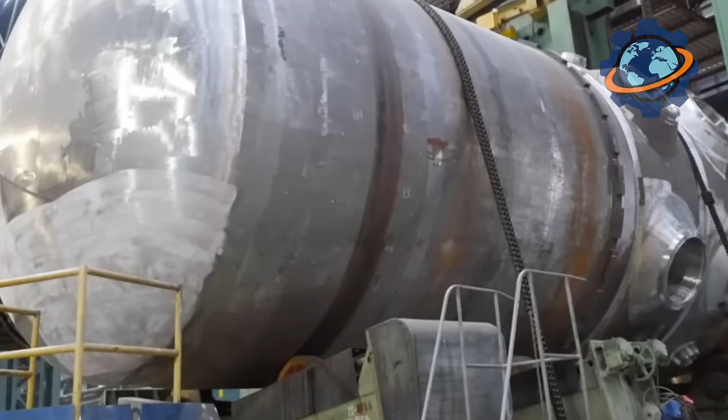Every second, 441 nuclear reactors worldwide generate electricity for 1 billion people. But here's what keeps engineers awake at night. Each reactor core operates at temperatures reaching 3,600 degrees Fahrenheit, hot enough to melt concrete, vaporize water instantly, and turn steel into liquid. The only barrier between civilization and nuclear catastrophe is a single steel vessel forged from a 600-ton ingot without a single weld.

Picture the weight of 4 blue whales compressed into one seamless cylinder, standing guard over controlled atomic fire. How does humanity forge the largest single-piece objects ever created? How do engineers ensure steel survives conditions that would liquefy most metals?

Stick around till the end. You'll discover why only one company on Earth can manufacture these reactor vessels, the jaw-dropping reason welds are forbidden, and the shocking truth about what happens when forging goes wrong at the atomic scale.

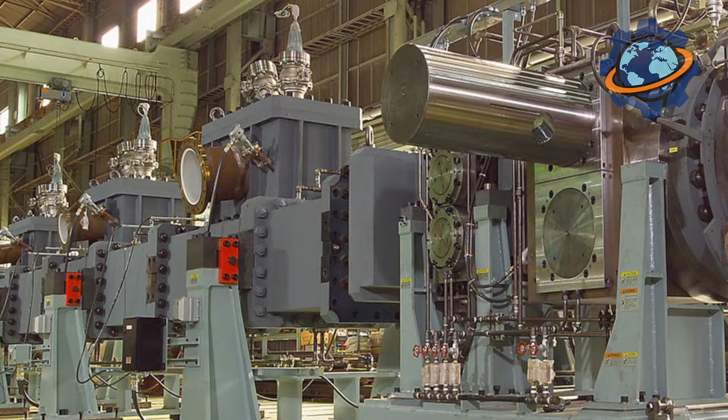The story begins at Japan Steel Works in Muroran, Japan, the only facility worldwide capable of forging complete reactor pressure vessels from single steel ingots. This monopoly isn't marketing, it's physics. Their forging press, standing 12 stories tall and weighing 14,000 tons, generates forces equivalent to stacking 70 Statues of Liberty on a dinner plate. That's the mechanical advantage required to shape 600 tons of glowing steel.

The facility consumes enough electricity to power 25,000 homes during forging operations. Backup generators the size of locomotive engines ensure power never interrupts mid-forge. A single unexpected cooling would create internal stresses shattering the vessel like glass.

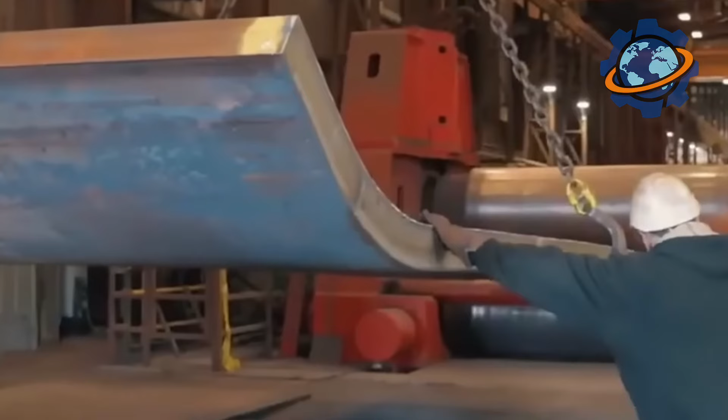The plant operates 3 shifts daily, yet completes only 4 reactor vessels annually. Each vessel requires 8 months from raw steel to finished product. That's longer than human pregnancy, applied to metalworking requiring tolerances measured in thousandths of inches across objects 30 feet tall.

Next comes steel creation, where metallurgists blend iron with precise amounts of manganese, nickel, chromium, molybdenum, elements chosen for neutron resistance and high temperature strength. The recipe, classified by nuclear regulatory agencies, creates alloy capable of withstanding 50 years of continuous neutron bombardment without becoming brittle. Standard steel exposed to reactor conditions becomes fragile within months. Reactor-grade steel must maintain ductility for half a century.

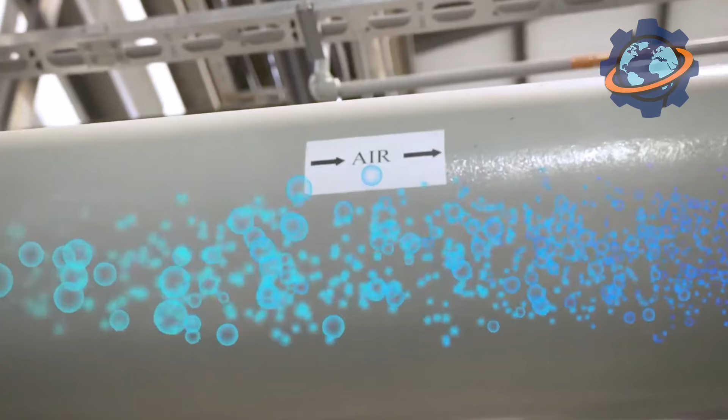Electric arc furnaces, consuming megawatts of power, melt 300 tons of scrap and alloys at 3,000 degrees Fahrenheit. Molten steel flows into massive ladles lined with refractory bricks capable of containing liquid metal without dissolving. Workers add deoxidizers and desulfurizers, removing impurities at parts per million levels. Even microscopic inclusions, trapped oxides, sulfides, or air bubbles become crack initiation sites under reactor pressures exceeding 2,200 pounds per square inch. That's pressure crushing car engines like soda cans.

Giant molds, assembled from water-cooled copper plates standing 20 feet tall, receive the molten pour. Liquid steel enters from bottom up through ceramic pipes, filling the mold cavity in controlled flow, taking 40 minutes. Technicians monitor fill rates continuously. Turbulence during pouring traps gas bubbles, creating voids.

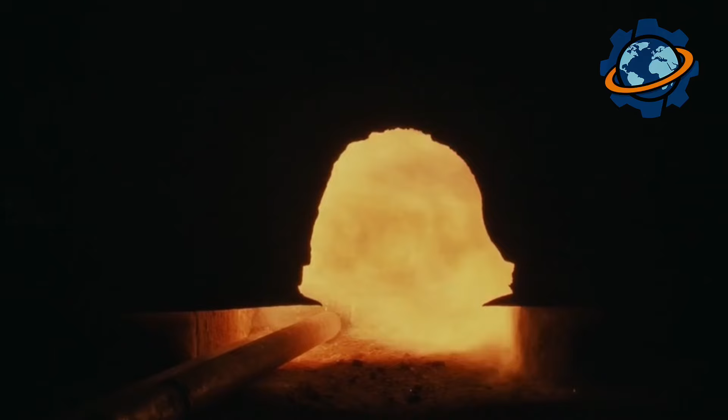After filling, the ingot, now a glowing cylinder weighing 600 tons, solidifies over 72 hours under computer-controlled cooling. This cooling phase determines everything. Cool too fast, thermal stresses create internal cracks invisible to naked eyes but catastrophic under reactor operation. Cool too slow, large crystals form, weakening the structure.

Thermocouples embedded throughout the mold measure temperature at 300 points simultaneously. The ingot shrinks 5 inches in diameter while cooling, enough movement to crack the mold if thermal expansion isn't calculated precisely. Workers strip the mold after 3 days, revealing a steel cylinder glowing dull red at 800 degrees.

Now comes forging, the ancient art of shaping hot metal, scaled to industrial extremes. The 600-ton ingot, reheated to 2,300 degrees Fahrenheit in furnaces large as houses, glows brilliant orange. At these temperatures, steel becomes plastic, not liquid, but deformable under immense pressure. Picture clay that weighs as much as a jumbo jet.

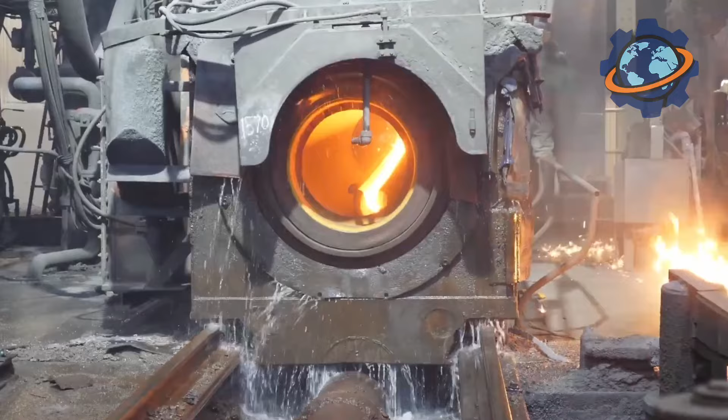Overhead cranes operating at weight limits requiring structural reinforcement throughout the building lift the glowing ingot onto the press bed. The press ram, a solid steel cylinder 6 feet in diameter, descends with force exceeding 14,000 tons. That's pressure equivalent to balancing 30 fully loaded Boeing 747s on a car hood. Under this incomprehensible force, 600 tons of steel deforms, spreading like bread dough, forming into a thick-walled cylinder.

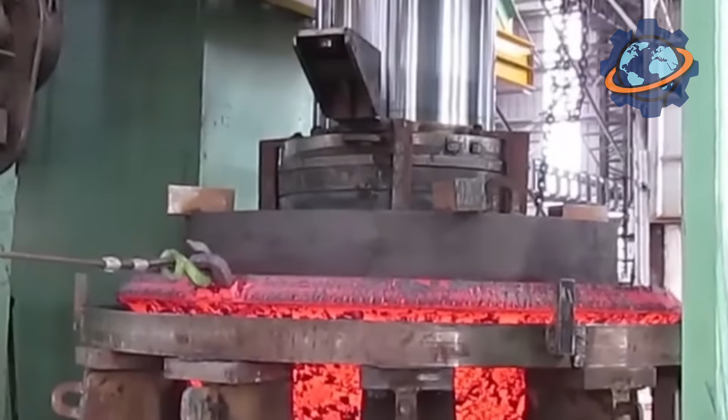Each press cycle compresses the ingot 3 inches, then retracts. The process repeats hundreds of times over weeks. The forging process requires balletic precision at colossal scale. After each press cycle, massive manipulators rotate the workpiece 7 degrees. Computer systems track rotation angle to within 0.1 degrees.

Because uneven forging creates thickness variations leading to stress concentration, the ingot must be reshaped uniformly, ensuring wall thickness varies less than 1% across the entire vessel. This step is critical because reactor vessel integrity depends on grain structure. Each press cycle compresses and elongates metal crystals, aligning them perpendicular to stress directions.

This crystallographic texture increases strength 30% over cast steel. Between press cycles, the workpiece returns to furnaces for reheating. Temperature drops to 1,800 degrees during forging, making steel too stiff to deform further. The ingot cycles between press and furnace 60 times, spending cumulative hours at extreme temperatures requiring constant atmospheric monitoring to prevent oxidation.

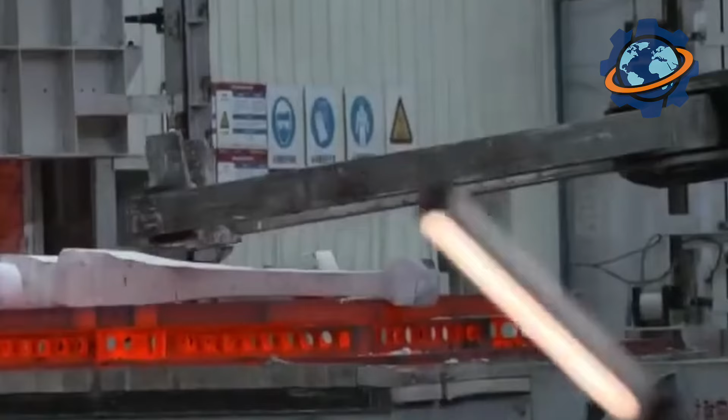After rough forging establishes basic geometry, precision machining begins. The forged cylinder, now weighing 450 tons after material redistribution, moves to vertical lathes with cutting surfaces 20 feet in diameter. Carbide tools, costing thousands of dollars and lasting mere hours, remove steel in continuous spiral cuts. Metal shavings, glowing red from friction heat, pile like metallic spaghetti.

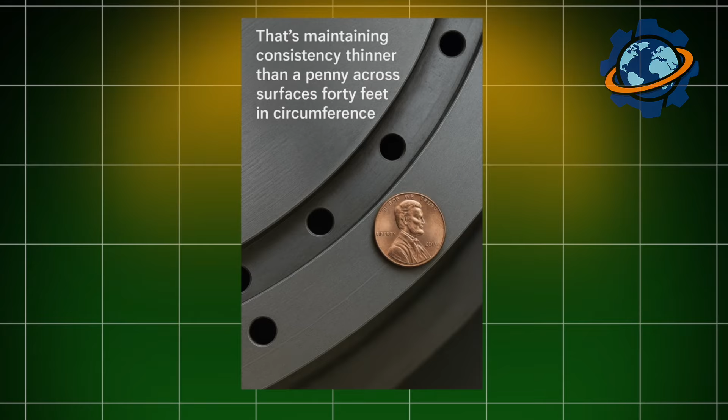Picture this. Machinists target wall thickness of 8.7 inches with tolerance of plus or minus 0.05 inches. That's maintaining consistency thinner than a penny across surfaces 40 feet in circumference. Ultrasonic sensors scan continuously, creating 3-dimensional maps of wall thickness. Any thin spot becomes a pressure concentration point, and at 2,200 psi operating pressure, stress concentrations cause catastrophic rupture.

Modern reactors operate at pressures where even microscopic flaws propagate into fractures within microseconds once initiated. Quality control transcends normal manufacturing standards, entering the realm of nuclear safety protocol. Ultrasonic inspection systems, using sound waves at frequencies beyond human hearing, detect internal flaws smaller than grains of rice. Technicians scan every cubic inch of the 450-ton vessel, searching for voids, inclusions, or crystal boundary irregularities. This inspection process alone takes 6 weeks of round-the-clock work.

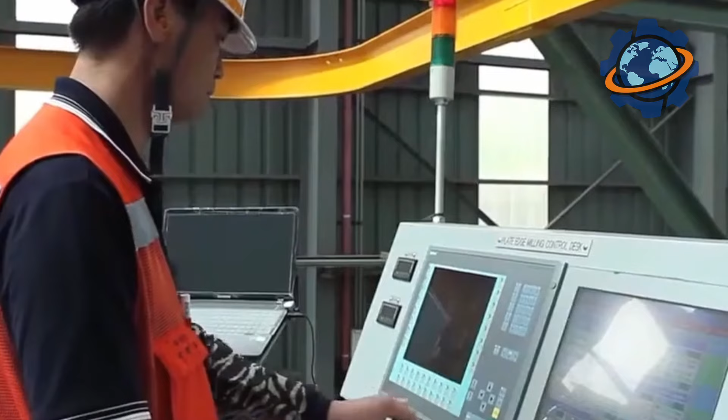Next comes stress relief heat treatment at 1,100 degrees for 48 hours. This annealing process allows internal stresses from forging to dissipate through atomic diffusion. Without stress relief, residual tensions from manufacturing cause cracks years later during operation.

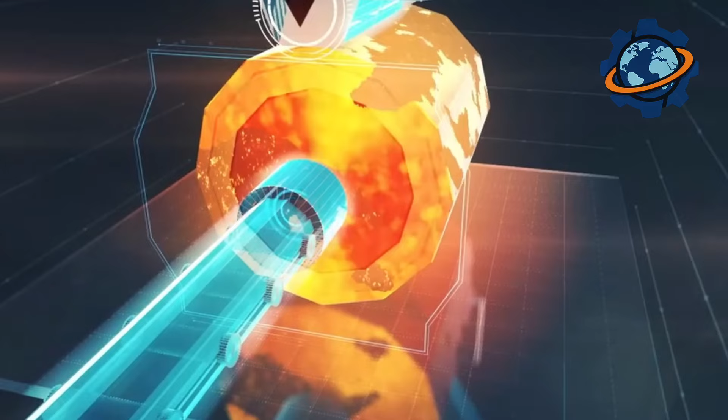After heat treatment, hydrostatic pressure testing subjects the vessel to 3,300 psi, 50% beyond operating pressure. Workers flood the interior with water, then pump pressure until the vessel expands measurably. Any weakness reveals itself through leakage or deformation. Passing this test certifies the vessel can contain reactor core meltdown scenarios.

The breakthrough came when Robert Withrich at Combustion Engineering proposed seamless forging in 1963. However, no forge press existed powerful enough. Japan Steel Works developed their 14,000-ton press in 1967 specifically for reactor vessels, recognizing the strategic importance. By 1975, all new reactor designs mandated seamless forgings.

Today, the safety record speaks volumes. Zero pressure vessel failures in commercial reactors using forged construction. The few accidents that occurred, Three Mile Island, Chernobyl, and Fukushima, involved cooling system failures, not vessel integrity. Those forged steel shells contain disaster, preventing far worse outcomes.

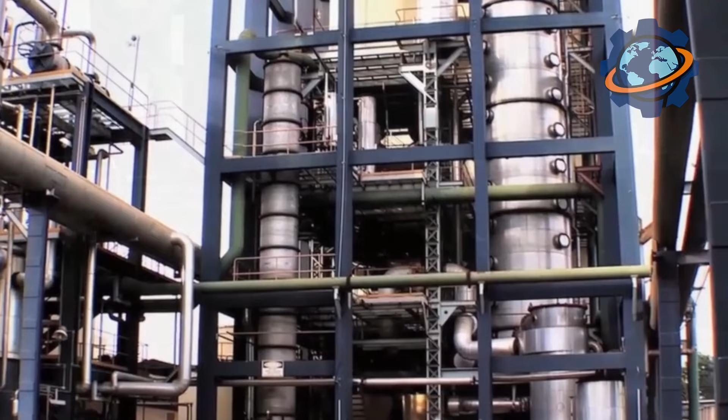So here's the secret promised. These vessels can't be welded because neutron radiation does something insidious to metal. It transmutes atoms. High-energy neutrons knock atoms from crystal lattice positions, creating vacancies and defects. Over decades, accumulated damage makes steel brittle. Welds, where crystal structures merge imperfectly, accumulate damage faster. The heat-affected zone becomes an embrittlement accelerator.

Seamless forging eliminates this Achilles heel entirely. Every atom in the vessel exists within continuous crystal structures aligned through forging. There are no boundaries to fail, no weak points to fracture. From 600-ton ingots to civilization's guardians, the cycle completes. We've engineered the ultimate containment, steel vessels standing between humanity and atomic fire for generations.

These aren't just industrial products, they're monuments to engineering paranoia in the best sense, over-engineering driven by understanding that failure means catastrophe. That forged steel cylinder represents humanity's ability to harness cosmic forces while building redundant safety margins into physical structures. We've learned to respect the atom's power by building cages worthy of containing it.

Every second, jet engines spinning at 12,000 revolutions per minute thrust hundreds of passengers across continents. But here's what defies physics. Inside those engines, turbine blades made of nickel alloy operate at 3,000 degrees Fahrenheit, temperatures exceeding their own melting point by 200 degrees. Picture holding ice cubes in boiling water without them melting.

That's the metallurgical miracle happening 35,000 feet above your head. How does metal survive temperatures that should liquefy it? How do engineers grow crystals larger than your hand from molten metal?

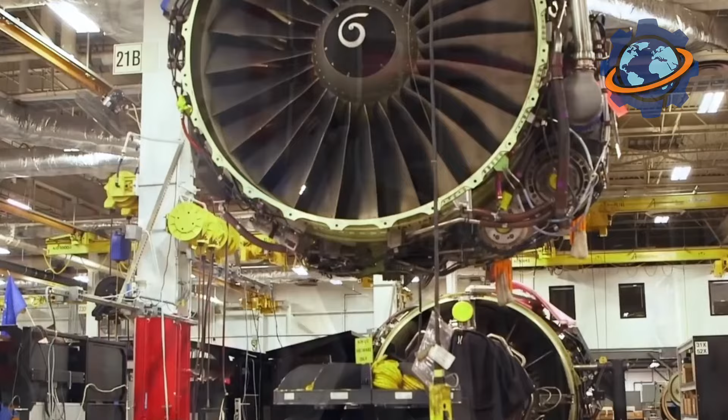Stick around till the end, you'll discover the jaw-dropping secret of single crystal manufacturing that eliminated metal's greatest weakness, and why a single turbine blade costs more than your car, yet lasts 20 years in literal hell.

The story begins in specialized foundries where clean room standards rival semiconductor fabs. These facilities maintain air purity of less than 100 particles per cubic foot, 10,000 times cleaner than normal atmosphere. Even microscopic dust particles cause catastrophic flaws in turbine blades spinning at speeds where centrifugal forces generate stresses exceeding 70,000 pounds per square inch. That's pressure crushing steel like aluminum foil.

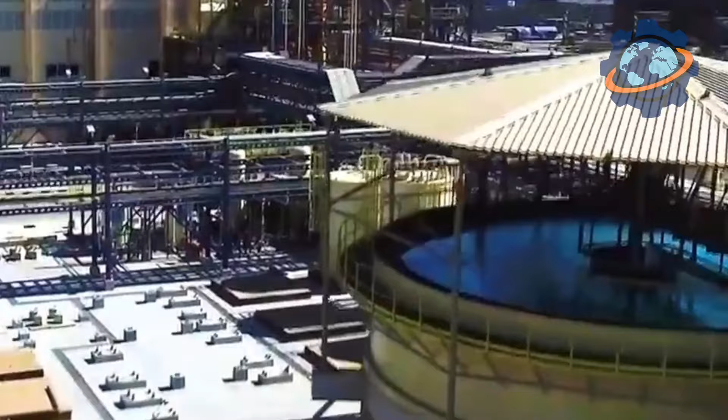Workers suit up in full-body cleanroom gear before entering casting halls. Inside, massive vacuum furnaces standing 2 stories tall and weighing 80 tons create environments replicating outer space. Vacuum pumps evacuate air until pressure drops to 1/1,000,000th of atmospheric pressure. At these conditions, materials behave differently. Impurities vaporize instantly. Gases trapped in metal escape, leaving behind purity impossible at normal pressure. Processing single batches costs $50,000 in electricity alone.

Next comes mold preparation, where ceramic shells, think pottery on steroids, get built layer by microscopic layer. Technicians dip wax patterns shaped like turbine blades into ceramic slurry 10 times, waiting hours between coats. Each layer adds thickness thinner than human hair. After 20 days of coating and drying, workers melt wax away in autoclaves, leaving hollow ceramic molds with internal channels more complex than human circulatory systems.

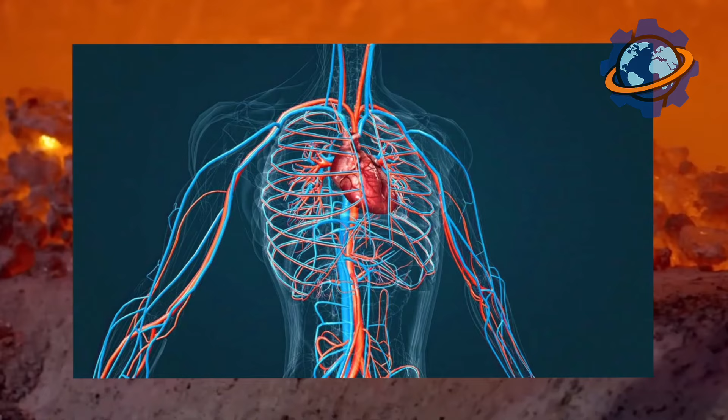These molds contain passages narrower than spaghetti strands, designed to cool blades from inside during operation. Some channels measure just 0.008 of an inch across, thinner than credit cards. Manufacturing these passages requires such precision that lasers verify every dimension. One blocked cooling hole means blade failure at 300 degrees lower temperature. That's the difference between safe flight and catastrophic engine disintegration at cruise altitude, scattering turbine fragments through fuselage like shrapnel.

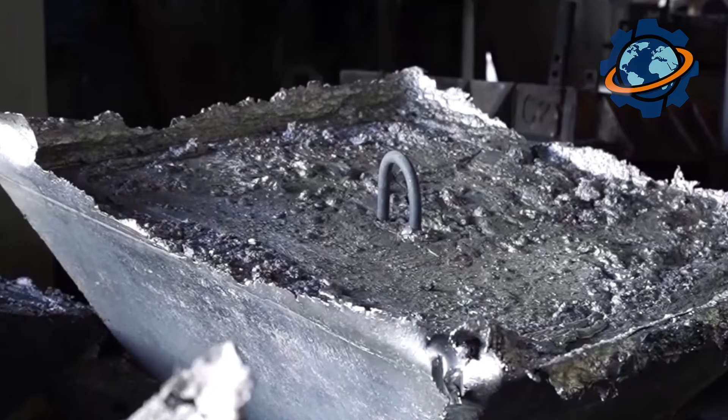Giant crucibles containing nickel-based superalloy. Mixtures of nickel, chromium, cobalt, aluminum, titanium, plus 6 other elements in exact proportions. Heat to 2,700 degrees Fahrenheit. Picture liquid metal glowing white like miniature stars captured in ceramic containers. This superalloy, developed through decades of research, contains more expensive elements per pound than fine jewelry. A single turbine blade uses materials costing $800 before any manufacturing begins.

Robotic arms lower ceramic molds into this molten inferno with precision measured in thousandths of inches. Timing matters critically here. Pour too fast, turbulence creates defects. Too slow, metal solidifies prematurely. Furnaces tilt at exactly 2 degrees per second, filling mold cavities in 17 seconds. During this pour, metal temperature drops 300 degrees, requiring computer-controlled heating to maintain consistency. One temperature fluctuation of 5 degrees ruins the casting, wasting months of preparation.

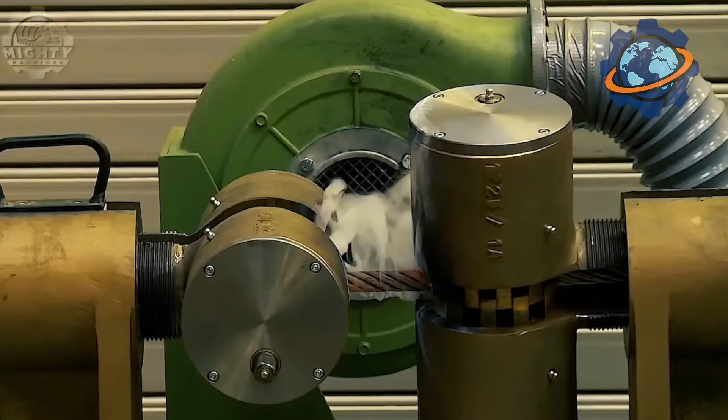Now comes the magic, directional solidification. The filled mold sits atop a water-cooled chill plate at 70 degrees Fahrenheit while surrounded by heating elements maintaining 2,400 degrees above. This creates the steepest temperature gradient in metallurgy, over 2,000 degrees difference across 6 inches. That's transitioning from Arctic to volcanic conditions in the space between your thumb and pinky. Slowly, incredibly slowly, a computer-controlled mechanism lowers the mold through the furnace at speeds of 6 inches per hour. Picture watching paint dry, then slowing that down tenfold.

As the mold descends, metal solidifies from bottom upward in a razor-thin freezing front. This directional cooling forces crystal growth in one direction only, upward, eliminating horizontal grain boundaries where cracks normally form. The process takes 14 hours for a 4-inch blade. Rush it by even 10% and polycrystalline grains form, destroying blade strength.

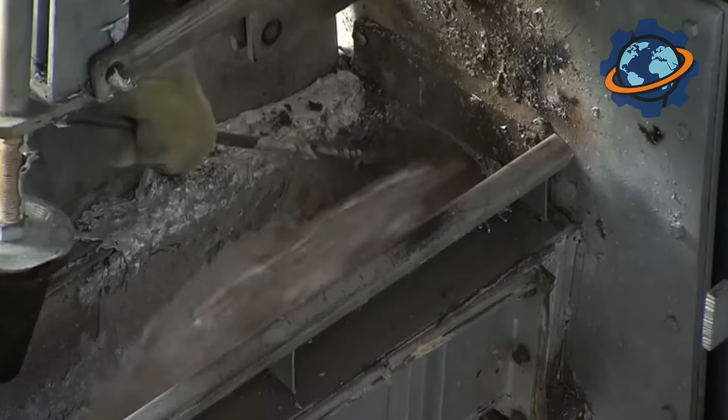But here's where physics becomes art. At the mold bottom sits a grain selector, a corkscrew-shaped passage so narrow only one crystal nucleus fits through. As metal solidifies upward, countless tiny crystals form at the chill plate. They compete, growing upward like metallic trees racing toward sunlight. Most hit the spiral walls and stop. Only the perfectly aligned crystal, the one matching the spiral's orientation, passes through this metallurgical gauntlet.

This step is critical because it ensures the entire blade, every atom from root to tip, belongs to one continuous crystal lattice. No grain boundaries exist anywhere. Normal metals contain millions of grain boundaries per cubic inch. Single crystal blades contain zero. Without boundaries, there are no weak spots where atoms slip past each other under stress. The crystal structure extends uninterrupted through the entire blade like a three-dimensional molecular Kevlar vest, with atoms locked in perfect geometric formation.

After solidification, blades undergo solution heat treatment at 2,200 degrees Fahrenheit for 2 hours, then quench in inert gas. This locks crystal structure permanently and precipitates microscopic strengthening phases throughout the lattice. Next comes aging heat treatment, multiple cycles at precisely controlled temperatures that cause nanoscale particles to form. These particles, called gamma-prime precipitates, occupy 70% of the alloy's volume.

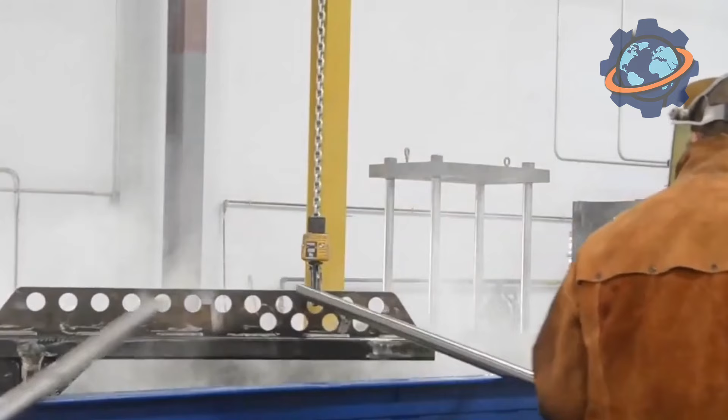Picture this. Imagine a three-dimensional checkerboard where hard particles pin the crystal lattice, preventing atoms from sliding. These precipitates remain stable at temperatures where other metals liquefy. They're the secret allowing nickel alloys to maintain strength at 3,000 degrees, temperatures where aluminum vaporizes, titanium melts, and even steel becomes taffy. The heat treatment process takes 96 hours of precise temperature control. Deviate by 15 degrees at any point and mechanical properties drop 40%.

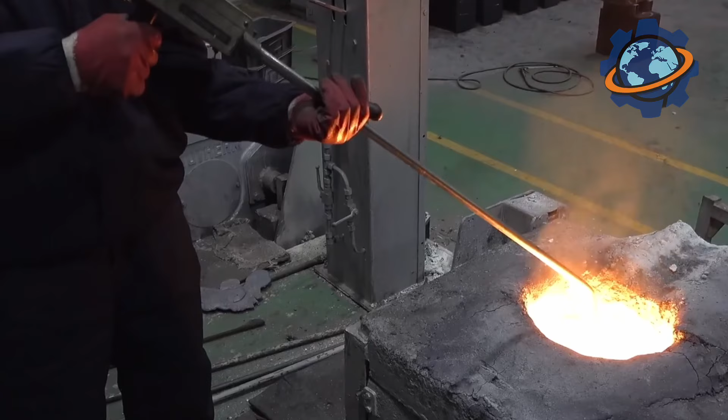Coating application transforms already sophisticated blades into thermal protection systems. First, a metallic bond coat, aluminum-rich alloy, gets applied via high-velocity plasma spray at 20,000 degrees Fahrenheit. Metal particles accelerate to twice the speed of sound, impacting the blade surface with such force they cold weld instantly. This creates a rough surface for subsequent layers while providing oxidation resistance.

Then comes the thermal barrier coating, yttria-stabilized zirconia ceramic, applied atom layer by atom layer using electron beam physical vapor deposition. In vacuum chambers, electron beams vaporize ceramic ingots. The vapor condenses on rotating blades, building up a coating 0.008 of an inch thick with a columnar microstructure full of microscopic pores. These pores act like thermal insulation, trapping air pockets that reduce heat transfer.

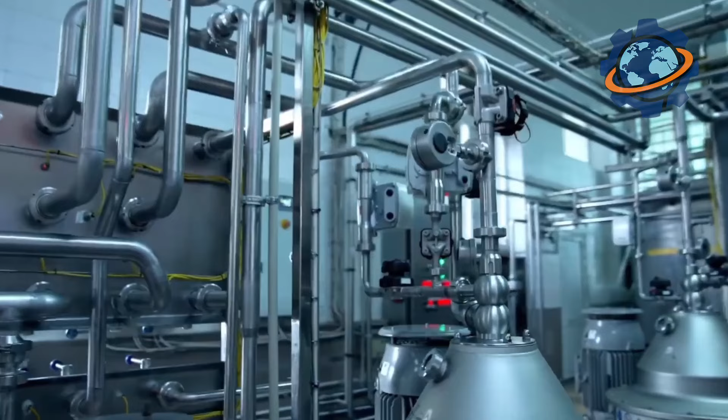The ceramic coating lowers blade temperature by 400 degrees, the difference between survival and meltdown. Modern engines couldn't exist without this coating technology. This wasn't always possible. Back in 1940, early jet engines used cast iron turbine blades lasting 20 hours before failure. Temperatures barely reached 1,400 degrees Fahrenheit.

The breakthrough came when Pratt & Whitney researcher Frank VerSnyder invented directional solidification in 1966, eliminating transverse grain boundaries and doubling blade life overnight. The true revolution arrived in 1982 when General Electric and Pratt & Whitney independently perfected single crystal casting. Turbine inlet temperatures jumped from 2,000 degrees to 3,000 degrees Fahrenheit, a 50% increase enabling massive efficiency gains. Modern turbofan engines achieve fuel efficiency triple that of 1960s designs.

Today, advanced engines like the GE9X powering Boeing 777X aircraft operate at 3,200 degrees, with pressure ratios reaching 60 to 1. These engineering advances cut aviation fuel consumption by 65% per passenger mile over 50 years. Carbon emissions dropped by 12% when replacing older turbine blades with modern single crystal versions in existing engines, equivalent to removing 18 million cars annually from global fleets.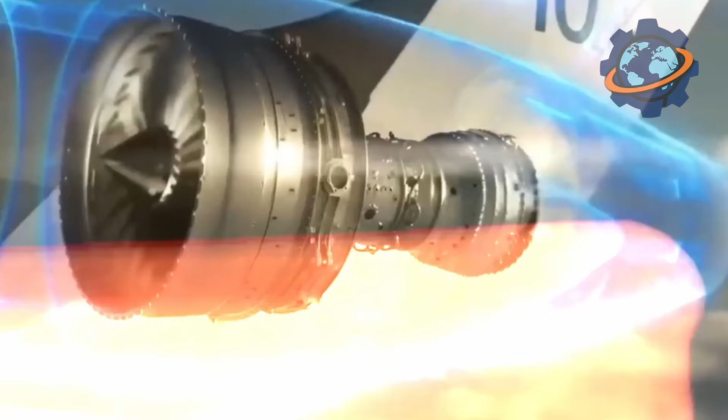Airlines save over $47 billion yearly through improved fuel efficiency. Maintenance costs drop 58% because single crystal blades last 3 times longer than conventional ones. So here's the secret promised. These blades don't actually survive above their melting point through material strength alone. They're actively cooled by air bled from the compressor, flowing through those microscopic internal channels at supersonic speeds.

This cooling air, already compressed to 400 degrees Fahrenheit, seems hot by human standards, but runs ice cold compared to the 3,000-degree combustion gases outside. Combined with ceramic coatings reflecting heat like mirrors, the actual metal temperature stays below 2,000 degrees, hot enough to glow orange, but survivable. From molten metal to flying miracles, the cycle completes.

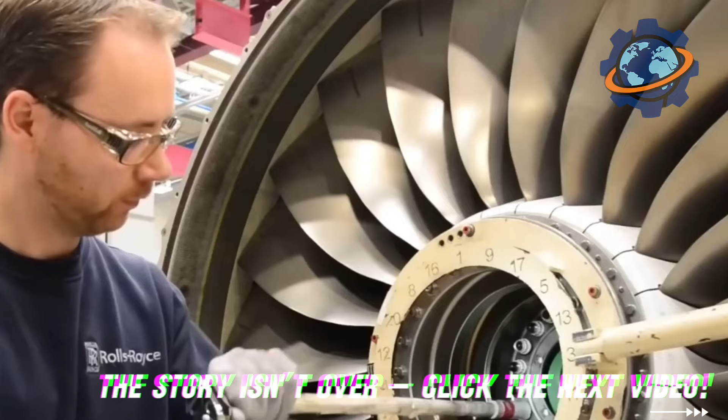Single crystal turbine blades represent humanity's most sophisticated metal casting achievement. Objects where every atom's position matters, where crystal orientation determines survival, where manufacturing tolerances make computer chips look crude. We've engineered metal to survive in conditions nature never intended, creating materials that work at their physical limits. That's not just manufacturing, that's molecular architecture enabling the modern world's ability to shrink distance itself.

Every year, over 100,000 kilometers of new rails are laid across the planet. And every single one of them goes through hell first. Fire over 1,500 degrees, the crushing force of rollers, and jets of water that cut metal like glass. From scrap heap to gleaming steel, a rail's journey is like an initiation, where every step decides whether it survives or shatters under the first train. But what makes this steel so perfect that it can handle thousands of tons of pressure every day without bending or cracking? Stick around, and you'll see how the arteries that move the entire world are born.

First, you gotta make the steel. A mix of scrap metal, iron ore, coke, and limestone gets dumped into the furnace, the raw ingredients for a future rail. The temperature in the blast furnace hits over 2,700 degrees Fahrenheit. That's 1,500 Celsius. Under that hellish heat, the metal turns liquid, glowing like the sun. Workers keep a close eye on the composition. Even an extra 0.1% of carbon can make the rail too brittle or too soft.

After melting, the molten steel is poured into molds, metal forms that create rectangular blocks called ingots or slabs. They don't look like a rail yet, just solid bars a few meters long and over a foot wide. After pouring, each blank is cooled, but not completely. It's kept warm to reduce stress during the rolling process.

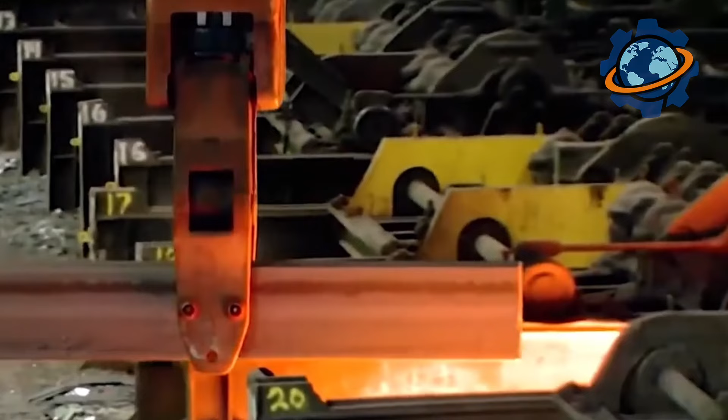This stage is the foundation for everything. If the steel comes out bad, even a perfect rolling job won't save it. So quality control here is almost a ritual. Chemists check the composition, metallurgists monitor the temperature, and automatic sensors track the cooling uniformity. Only when every single parameter is locked in does the blank move on into the fiery heart of the rolling mill.

In the rolling mill, massive billets, up to 20 meters long, are heated in furnaces to over 2,200 degrees Fahrenheit, 1,200 Celsius. The metal becomes pliable, like dough, but keeps its density and strength. The hot blank is immediately fed into reversing rolling stands. These are huge machines with heavy rollers. It passes through them several times, first to reduce its thickness, then to give it the right shape.

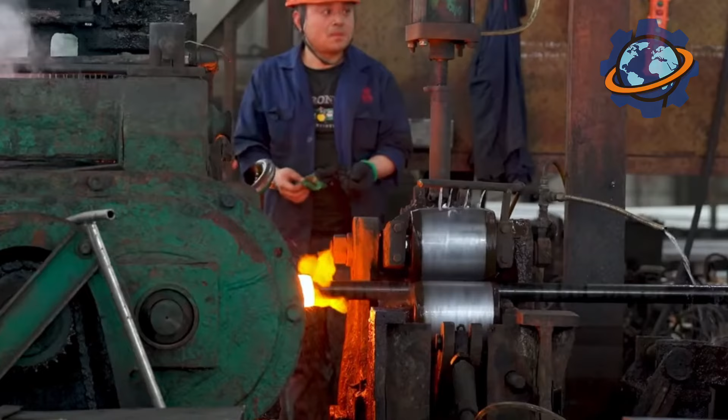Each pass is a squeeze and stretch, gradually transforming the metal from a simple billet into a future rail with its complex profile: the head, the web, and the foot. To get the exact geometry, they use a final sizing roll. It's like the final polish of the shape, with tolerances on this step not exceeding 0.3 of a millimeter.

Right after rolling, while the rails are still hot, they go through a cooling process. They're either evenly blasted with air or left to cool on an open rack. It's crucial that the cooling is symmetrical, otherwise the metal could warp.

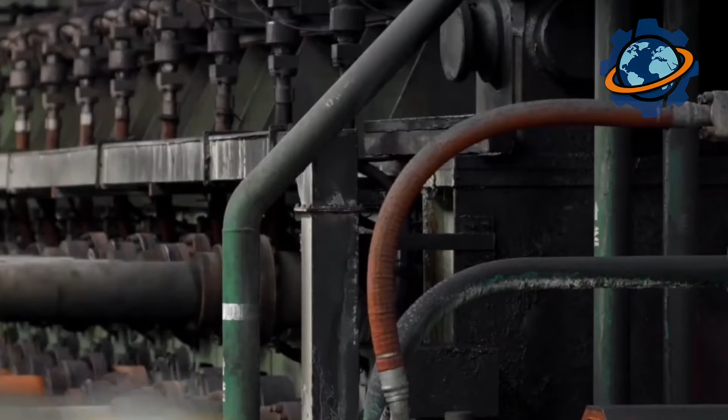To ensure a smooth, bump-free ride at high speed, individual rails are welded into long sections, up to 400 meters without a single joint. The main method is thermite welding. In a special mold between two rails, a gap of a few millimeters is left. A molten steel mixture, created by the reaction of powdered aluminum with iron oxide, is poured in. The temperature hits a scorching 4,500 degrees Fahrenheit, 2,500 Celsius.

This molten metal flows into both parts of the rail and fills the joint area. When it solidifies, it creates a monolithic bond, stronger than the rail itself. After that, the excess metal is trimmed off, and the weld is ground down to a perfectly smooth level, without a single bump. Every joint is inspected with ultrasound or eddy currents to make sure there are no hidden micro cracks.

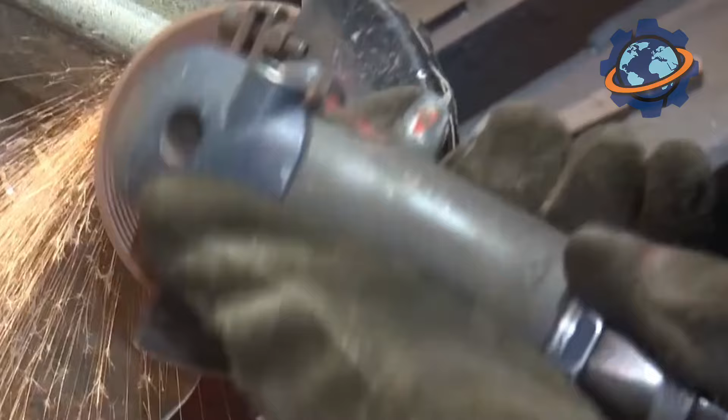These long rails are easier to transport than you'd think. They're either wound onto special drums or carried on platforms with pivoting supports. And on the construction site, the sections are joined again, this time by welding or using special bolted joints. The result is a continuous rail line that stretches for kilometers without a single click. The same silent glide we've come to expect on high-speed trains.

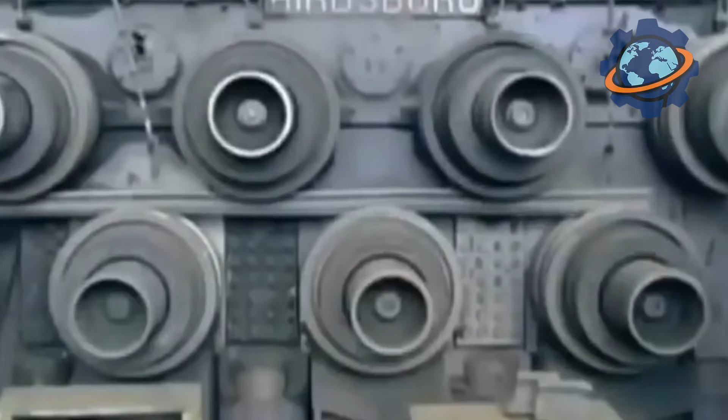But first, after rolling and welding, the rails are still alive. There's stress left inside the metal, and the grain structure needs to be stabilized. This is where heat treatment comes in, giving the rail its strength, wear resistance, and durability. And it looks almost like a metallurgical spa session. The rail is rapidly heated to high temperatures, around 1,800 degrees Fahrenheit, 1,000 Celsius. This is done in furnaces, tens of meters long, where the temperature is controlled to the degree. At this heat, the steel's crystal lattice shifts into a new state, austenite.

But the main event starts after that. The rail is instantly cooled. Jets of high-pressure water are aimed along the head and web, the very parts the wheel rolls on. The temperature drops in a flash, and a new structure forms in the metal, martensite, an extremely hard, wear-resistant phase.

But to avoid brittleness, the rail is slowly heated and cooled one more time. This balances the structure, relieves any extra internal stress, and ensures the rail can handle frost, heat, and thousands of trains a day. In the end, the metal holds its shape and withstands pressures of tens of tons per square inch without deforming.

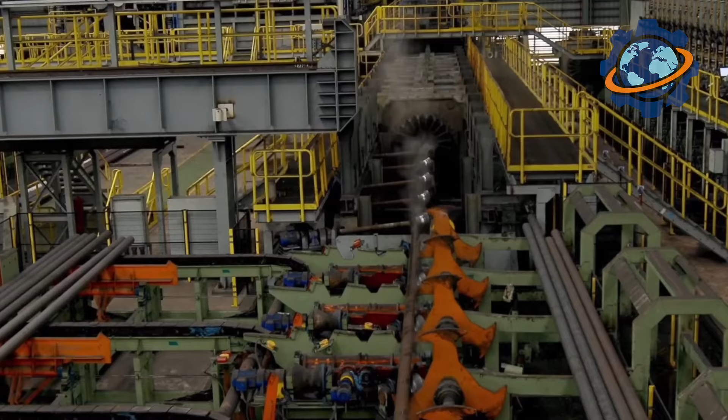Before a rail hits the road, it goes through a whole series of tough tests, like it's trying to join an army of high-speed transport. In special labs, it's checked for strength, hardness, geometry, and internal defects. First up, ultrasonic testing. High-frequency waves are sent into the rail. If there's a micro crack or void inside, the signal bounces back and flags the problem.

Then, hardness measurements along its entire length to make sure the heat treatment was uniform. At the same time, its straightness and profile are checked. Laser sensors scan every inch, detecting even tiny warps that could cause vibration or wear. And finally, bend and impact tests. A piece of the rail is loaded with pressure dozens of times greater than the weight of a train to make sure it can handle any challenge on the route. When the rail has successfully passed all the tests, it's time for its most important journey, to the installation site.

But how do you transport giant metal strips over 90 meters long? Regular trucks can't handle it. Here, they use special railway platforms with curved supports that reduce stress and prevent the rail from sagging or vibrating during transit. Sometimes, rails are transported already welded into even longer sections, from 400 to 600 meters.

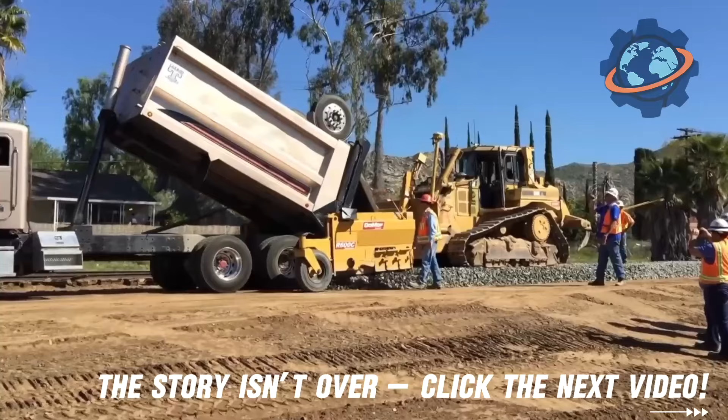Before installation, the rails are heated or cooled depending on the ambient temperature. This is to compensate for the thermal expansion and contraction of the metal. Otherwise, it would buckle in the heat or gaps would form in the cold. In practice, each rail is laid with these physical changes in mind, usually at a stress-free temperature point.

How does rust-colored rock transform into gleaming steel skyscrapers? How do ancient mountains become modern civilization? Stick around till the end. You'll discover why iron shaped human history more than gold ever did, and the jaw-dropping secret hiding inside every bridge, car, and building around you right now.

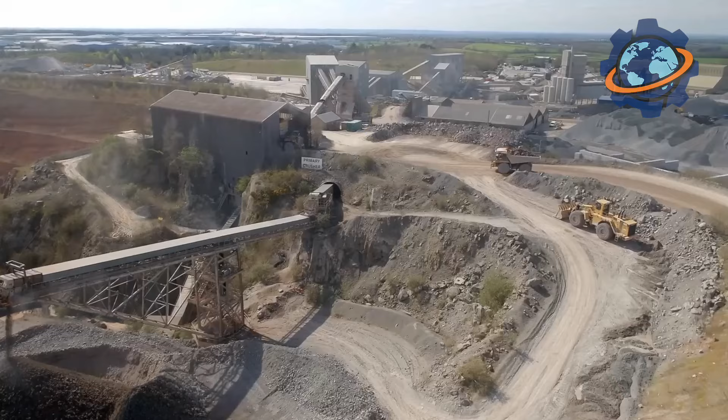The story begins in Western Australia's Pilbara region, where iron mountains stretch across landscapes older than dinosaurs. Massive excavators, standing 8 stories tall, picture buildings that walk, tear into rust-red cliffs with bucket teeth weighing 12 tons each. These mechanical giants rip through rock layers formed 3 billion years ago when Earth's oceans first rusted.

With thunderous crashes echoing across 40-mile-wide craters, each excavator loads haul trucks carrying 400 tons per trip. That's the weight of 80 elephants moving at 40 miles per hour on tires taller than basketball hoops. Processing 30 million tons annually from single mines, enough iron ore to build 12 Golden Gate bridges every single day.

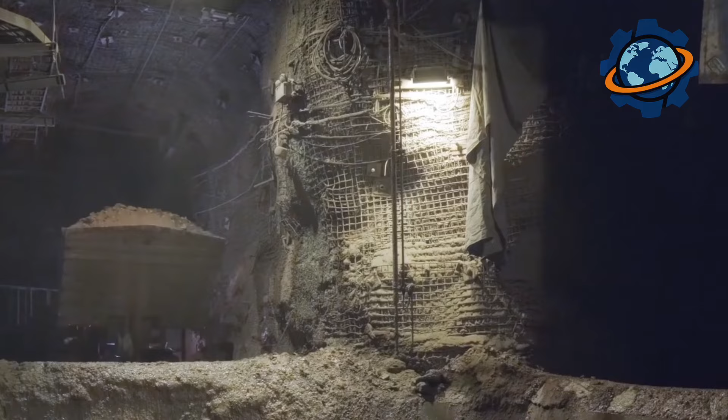Next comes crushing, where house-sized jaw crushers, imagine dinosaur mouths made of hardened steel, pulverize boulders into gravel-sized chunks. With deafening roars splitting eardrums even through protection, these crushers generate forces exceeding 20,000 pounds per square inch. Clouds of red dust billowing upward create artificial sunsets visible from space satellites.

Conveyor belts stretching 12 miles long, longer than Manhattan, transport crushed ore at 18 miles per hour. Workers riding inspection carts traverse distances requiring 25 minutes one way. That's enough belt to wrap around 300 football fields. Every hour, 50,000 tons flow through this system, weight equivalent to 5 Eiffel Towers moving continuously past checkpoints.

Giant grinding mills, standing 5 stories tall, with diameters matching Olympic swimming pool widths, pulverize rock into fine powder. Inside these rotating drums, 20-ton steel balls, each weighing more than shipping containers, tumble with ore, creating grinding thunder heard miles away. Operators monitor vibrations. Wrong frequencies mean catastrophic bearing failures, costing millions.

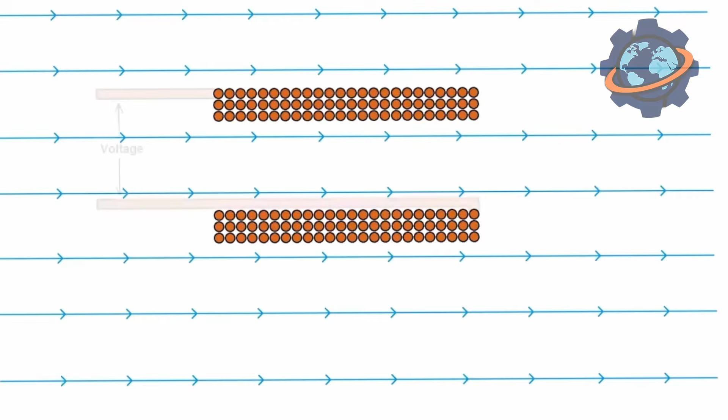At rotation speeds creating gravitational forces triple normal Earth gravity, particles shrink to powder finer than talcum. Processing 8,000 tons hourly, that's filling semi-truck after semi-truck every 30 seconds. This powder, called concentrate, contains 65% iron. Magnetic separators then extract iron particles using forces strong enough to levitate railroad spikes, leaving waste rock behind.

Next comes the blast furnace, a towering inferno standing 30 stories high, its steel shell glowing dull orange even from outside. At internal temperatures exceeding 3,000 degrees Fahrenheit, hot enough to vaporize aluminum instantly, iron ore transforms into liquid metal. Picture Dante's Inferno engineered with precision.

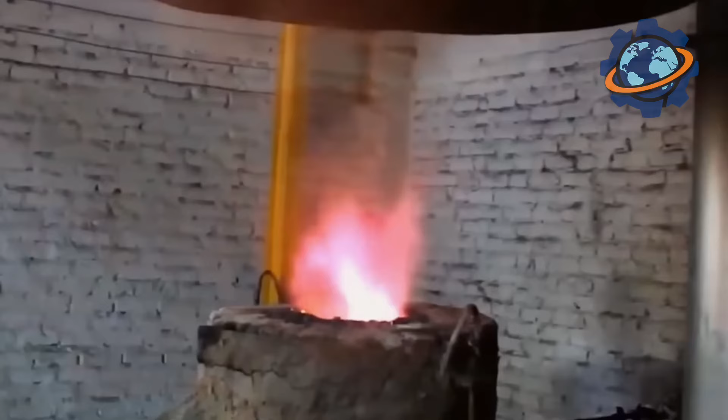Measured charges of iron ore, coke, and limestone descend from the top, while superheated air blasts upward at 2,000 degrees from ring-shaped nozzles called tuyeres. This creates a raging chemical storm, where carbon monoxide rips oxygen from iron oxide molecules. The reaction releases enough heat to melt granite. Every 3 minutes, sensors check 20 different parameters. Without precision, furnaces explode with force demolishing city blocks.

The blast furnace operates continuously for 15 years, never cooling, never stopping, like Earth's core relocated to industrial facilities. Inside this chemical reactor, materials descend through distinct zones. Upper regions preheat incoming ore. Middle zones drive off moisture and carbon dioxide. Lower depths become hell itself, where iron liquefies.

At the hearth bottom, molten iron collects at 2,800 degrees Fahrenheit, dense as lead but flowing like water. Every 4 hours, workers drill through clay-plugged tap holes. Liquid iron erupts in blinding white rivers, flowing through ceramic channels into railroad cars holding 300 tons each.

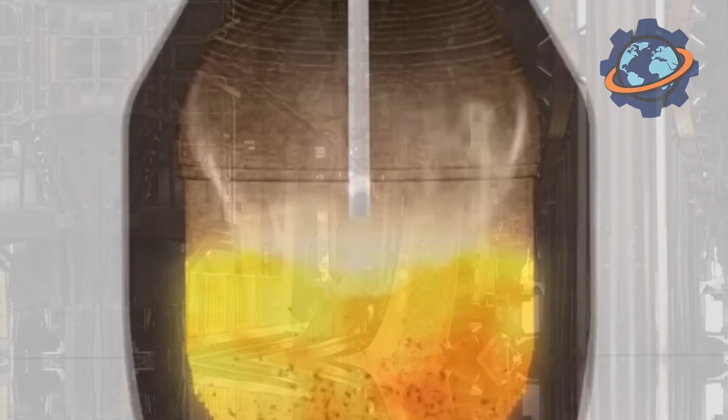This step is critical because timing determines metal purity. Tap too early, slag contaminates. Too late, furnace pressure ruptures containment walls. After tapping, slag, lighter impurities floating atop molten iron, gets diverted into separate channels. This glowing amber liquid, essentially liquefied rock, contains calcium, silicon, and aluminum oxides stripped from ore.

Rather than waste, it becomes roadbed material and cement ingredient recycled at 98% rates globally. The molten iron, called pig iron, contains 4% carbon, too brittle for construction. Picture glass that looks metallic. Drop pig iron from waist height, it shatters into fragments.

Next comes the basic oxygen furnace, where pure oxygen blasted at supersonic speeds through 3-foot diameter lances burns away excess carbon in 17 minutes. Flames shooting 70 feet high, temperatures hitting 3,200 degrees, create hurricane-force winds inside steel vessels holding 350 tons of liquid metal.

Steel making requires precision rivaling brain surgery. Computer-controlled oxygen flow adjusts by milliseconds. Operators add exact amounts of manganese, silicon, chromium, elements changing steel properties dramatically. Too much carbon, steel cracks in winter cold. Too little, metal bends under load.

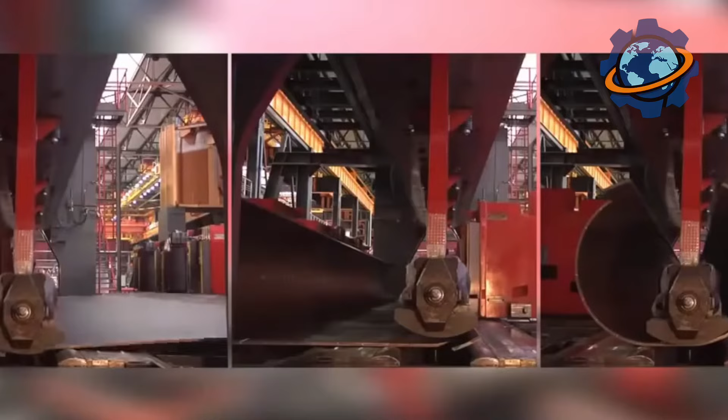Picture this: alloying elements get injected via submerged lances. Electromagnetic stirring, invisible but powerful, homogenizes composition. Samples extracted every 3 minutes get analyzed via spectrometers, determining chemistry within seconds. Modern furnaces achieve carbon content accuracy to 0.01%, the difference between a skyscraper standing or collapsing.

After refining, liquid steel flows into continuous casting machines producing slabs 30 feet long, weighing 25 tons, at rates of 1 slab every 90 seconds. This wasn't always so advanced. Back in ancient Anatolia around 1300 BC, Hittite metallurgists discovered heating iron ore with charcoal produced workable metal. That breakthrough, accidental furnace conditions reaching iron's melting point, changed human civilization forever. Iron tools outperformed bronze, enabling an agriculture revolution.

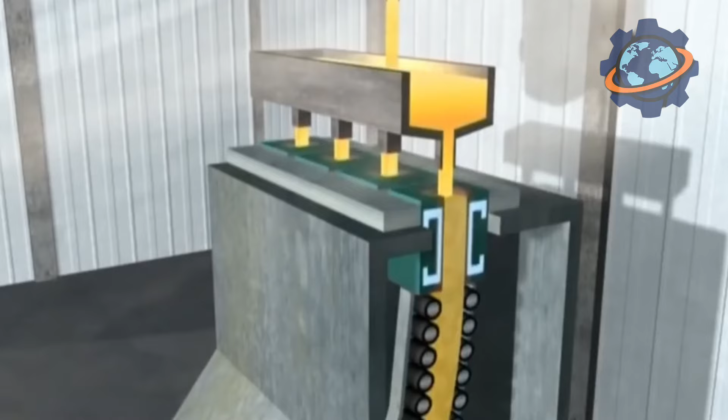The breakthrough came when British inventor Henry Bessemer patented his converter in 1856, slashing steel production time from 24 hours to 17 minutes. Suddenly, steel costs dropped 90%. This single invention built modern cities. Skyscrapers, bridges, railroads exploded across continents. Today, global steel production exceeds 1.9 billion tons annually. That's enough to build 75,000 Eiffel Towers yearly, or manufacture 43 million automobiles, or construct bridges connecting every coastline on Earth.

Carbon emissions drop by 62% when using recycled steel versus virgin ore, equivalent to removing 12 million cars annually. Industry saves over $80 billion yearly through scrap recycling. Processing costs drop 43% because melting scrap requires 1/3 the energy of blast furnaces. So here's the secret promised. Every ton of steel you see, bridges, buildings, cars, will be recycled indefinitely.

Unlike plastic decomposing into microparticles or paper pulping into mush, steel never degrades. Magnetic separation extracts it perfectly from demolished structures. That girder in your office building might contain steel from 1930s locomotives. Your car's frame could include battleship armor from World War II. Nothing disappears. Metal merely transforms, reborn eternally.

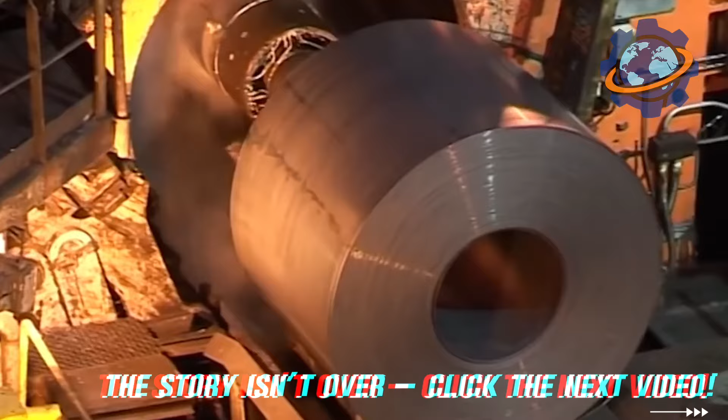From ancient mountains to modern marvels, the cycle completes. Iron, humanity's most essential metal, circulates through civilization like blood through veins. We're not consuming Earth's iron, we're borrowing it, briefly, before passing it forward to futures we'll never see.

Every year, the world produces over 130 million tons of glass. But few people know that behind every clear window, bottle, or skyscraper facade lies a true symphony of fire, air, and light. Imagine a river of molten sand flowing over a mirror of tin, giving birth to perfectly flat sheets of glass so smooth they can reflect the clouds.

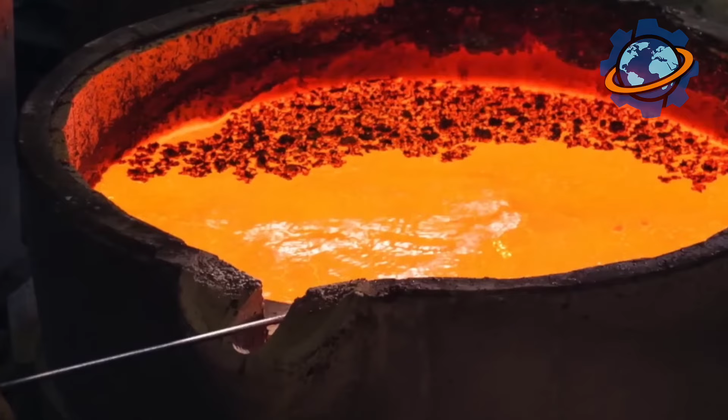But there's another kind of glass, one that's alive, with a soul, created by the breath of a craftsman and the fire of a furnace. Stick around to the end, and you'll see how ordinary sand travels through a 3,000-degree journey to become the transparent marvel our world is made of.

While the vast majority of architectural glass today is born from a perfectly flat, fiery river flowing over molten tin in the float process, the true soul of the material is revealed in the methods that give it character and uniqueness. This journey from a simple, transparent sheet to a work of decorative art is a fascinating one.

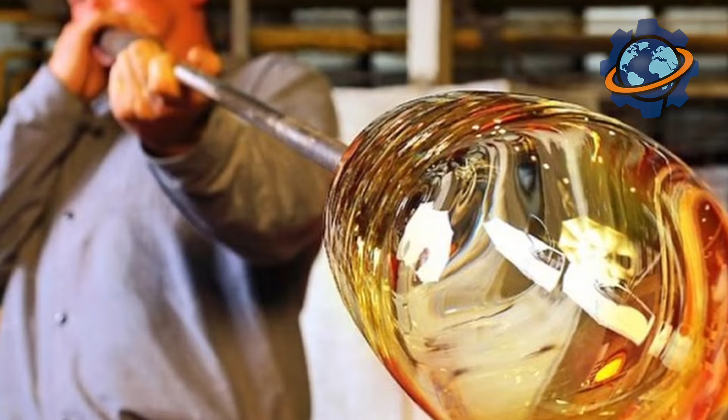To create glass with individuality that carries the mark of a human touch, craftsmen still turn to techniques that have existed for centuries. A glassblower dips his long, hollow pipe into a furnace where a mass of sand and other minerals boils at 2000 degrees Fahrenheit. He gathers a honey-like ball of glowing glass on the end of the pipe and, skillfully rotating it, begins to blow air into it. The initial bubble, born from his breath, gradually transforms into an elongated, shining hollow cylinder.

Thanks to the force of gravity and skillful swinging, this cylinder can reach several feet in length. After the ends of the cylinder are cut off, it's sliced lengthwise and placed back in the furnace. There, under the heat, it slowly unrolls like a scroll, and the craftsmen smooth it into a flat sheet.

Glass born this way is never perfectly flat. It's alive, retaining subtle waves, tiny air bubbles, and fine lines that tell the story of its fiery birth. This glass has a watery, organic quality that can't be replicated by a machine. But the creation of unique glass doesn't stop at forming the sheet itself. Other methods transform ordinary sheets into complex decorative elements.

Fusing allows artists to literally paint with glass. Different colored pieces of glass are arranged on a base sheet and sent into a kiln, where at 1500 degrees Fahrenheit, they melt together into a single piece, creating bright, painting-like compositions.

Closely related is the process of slumping, or bending, where a flat sheet of glass is heated until it becomes soft and sags under its own weight, taking the shape of a ceramic or metal mold placed beneath it. This allows for the creation of curved panels and three-dimensional glass sculptures.

Modern technologies add even more possibilities. Lamination allows for baking colored films, fabrics, or even thin sheets of metal between two layers of glass, creating endless variations of color and texture. Sandblasting and chemical etching remove the top layer of glass, making it matte and creating intricate patterns on its surface, from simple geometric shapes to photorealistic images.

In this way, by combining ancient crafts with cutting-edge technology, modern production transforms simple glass into an expressive architectural material capable of shaping light, color, and space. In today's world, where tons of used glass containers are collected daily, the journey from the recycling bin to a new bottle isn't just remelting. It's a high-tech odyssey driven by computers and light.

Imagine a mountain of crushed glass, dozens of feet high, where clear, green, and brown shards are mixed with labels, caps, and ceramic contaminants. Turning this chaos into pure raw material is a job for a whole complex of smart machines. It all starts with mechanical crushing, where steel hammers turn bottles and jars into fragments a few inches in size. This stream of glass, like a moving river, embarks on a journey through a labyrinth of sorting systems.

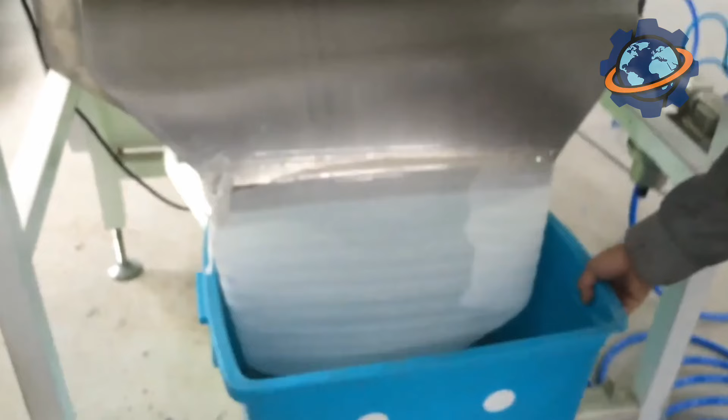First, powerful magnetic separators pull out any steel contaminants, and then eddy current systems literally shoot aluminum caps and foil into separate containers. Powerful blasts of air blow away light paper labels and plastic residue. But the hardest task is yet to come. Removing impurities that are almost identical to glass in weight and size, like pieces of ceramic, stone, or porcelain. These enemies of glass don't melt at standard temperatures and turn into defects in new products, so their removal is critically important. This is where optical sorting comes into play.

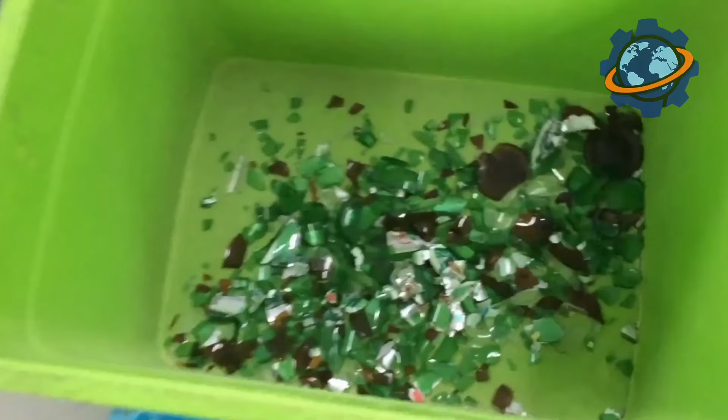The glass fragments are accelerated on a conveyor belt to high speed and fly through a scanning zone. For a split second, each fragment is illuminated by a bright light, and high-speed cameras take hundreds of pictures. A computer system, with lightning speed, analyzes the images, identifying foreign bodies by their transparency, structure, and shape. As soon as the system spots an opaque piece of ceramic, it instantly calculates its trajectory and commands a battery of air jets. A precise, sniper-like puff of compressed air knocks the unwanted element out of the mainstream, sending it to waste. This process is repeated thousands of times a minute.

At the same time, an equally important sorting by color takes place. The same optical systems analyze the spectrum of light passing through each fragment. The machine distinguishes between crystal clear, rich green, and deep brown glass. Depending on the set program, the system can, for example, select only clear glass, knocking out all colored fragments with air jets, or separate the stream into 3 distinct color fractions.

The result is a perfectly clean, color-sorted raw material, cullet, ready for a new life without any loss of quality, which is the pinnacle of the modern circular economy. This raw material can then be used to make flat glass. The birth of modern flat glass is a symphony of fire and precision, a spectacular process that turns ordinary raw materials into perfectly transparent sheets.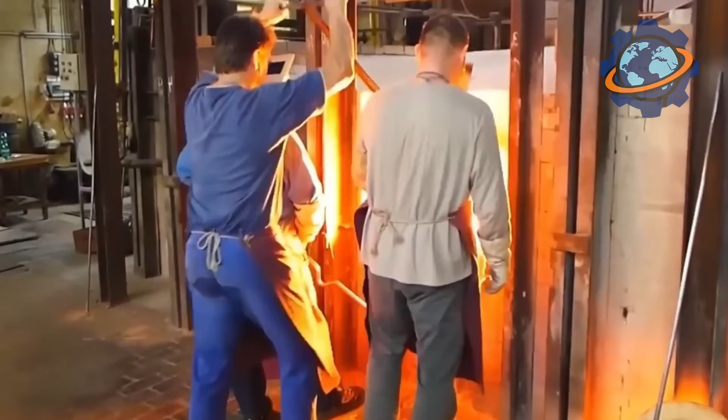It all begins in a massive melting furnace, the fiery heart of the plant that runs continuously for years. Into this furnace, which resembles a lake of molten fire, a carefully measured mix, or batch, is loaded, consisting of pure quartz sand, soda ash to lower the melting temperature, and limestone for stability. A significant amount of cullet, or crushed recycled glass, is added to this to help speed up the melting process. Inside the furnace, at hellish temperatures approaching 3,000 degrees Fahrenheit, these solid components slowly transform into a uniform, viscous liquid.

The melting process is strictly controlled to ensure all particles are completely dissolved and gas bubbles are removed, creating a flawlessly pure melt. From the furnace, this stream of glowing orange molten glass, resembling a river of lava, flows smoothly into a bath of molten tin. This is the culmination of the process known as the float process.

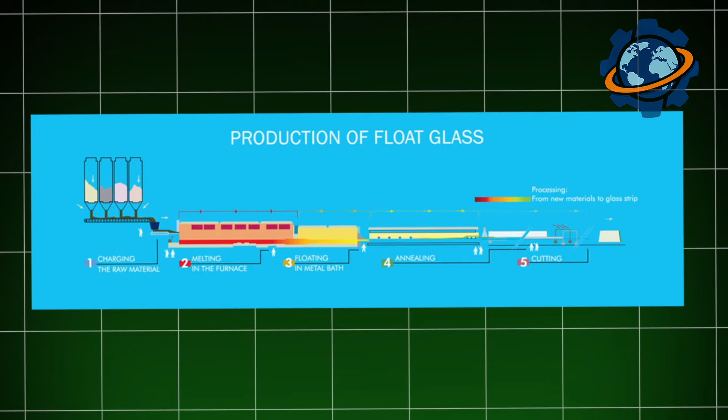The tin bath, stretching for hundreds of feet, has a perfectly smooth, mirror-like surface. Since glass is lighter than tin and doesn't mix with it, it spreads out over the surface, forming a perfectly flat ribbon of uniform thickness. Gravity levels it from the bottom, and surface tension smooths it from the top, creating impeccable optical quality. The speed at which this ribbon is pulled from the bath determines its final thickness with pinpoint accuracy.

After forming a perfectly flat surface, the glass ribbon, still very hot but now solid enough to hold its shape, enters the calmest but most critical stage, annealing. It enters a long tunnel known as an annealing lehr. If glass is cooled too quickly, its surface will contract faster than its interior, leading to massive internal stresses that will make it brittle and prone to shattering.

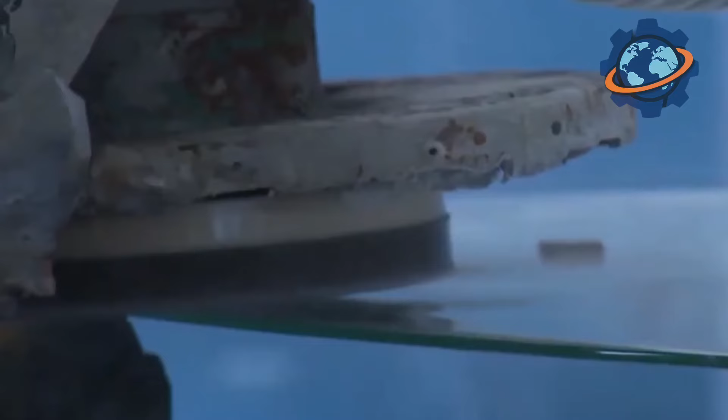In the lehr, however, the glass temperature is slowly and controllably reduced over several hundred feet, from over 1,000 degrees down to room temperature. This process allows the entire sheet, both surface and core, to cool evenly, relieving all internal stresses. From the other end of the lehr emerges a single, flawless, continuous ribbon of perfectly transparent, stress-free glass, ready for automatic cutting into huge sheets that will become the windows, facades, and doors of our world.

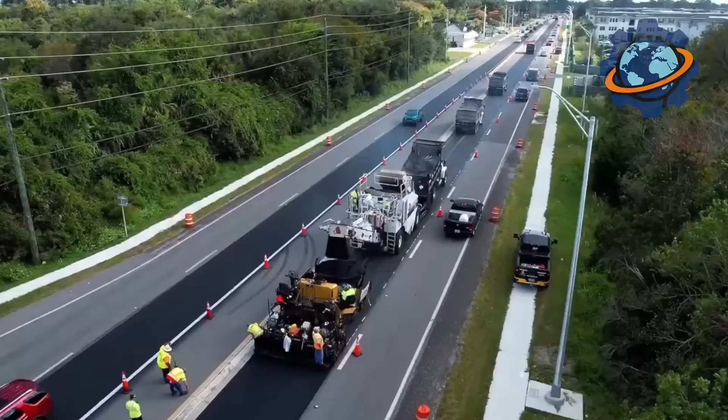Every year, the world lays down over 1 billion tons of asphalt, the material that modern civilization would literally grind to a halt without. But few people know that every foot of road is the result of a complex alchemy of stone, fire, and oil. It all starts with an explosion in a quarry and ends with a hot, black mass steaming under the wheels of a roller. In this video, you'll see how asphalt is born, from blasting rock to the final roller that polishes a new road. And if you stick around to the end, you'll learn a secret that most drivers don't even know exists.

Almost nothing goes to waste. That crushed old asphalt is then added to the new mix back at the plant. On average, new asphalt laid on our roads contains about 22% recycled material. The payoff here is huge, both economically and for the environment. First, it drastically cuts down on the need to quarry new stone and produce new bitumen, which saves natural resources and energy. Second, it makes the final product cheaper, saving billions of dollars from road maintenance budgets.

So, every car trip you take is a journey on a complex piece of engineering that not only withstands massive loads, but is also a prime example of an industrial ecosystem where the old is constantly reborn into the new, closing the loop and making the country's infrastructure a little more sustainable.

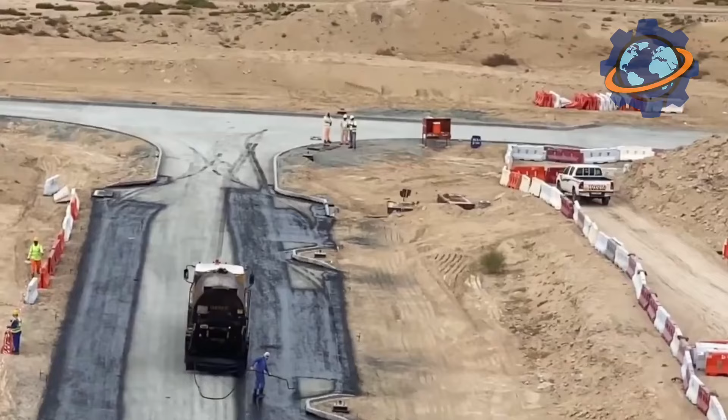The story of asphalt doesn't start on the road. It starts in 2 completely different places. The first is a quarry. It's a massive wound on the face of the earth where rock is blasted out. It all begins with a loud explosion that shakes the ground for miles. Huge boulders break away from the rock face. Then, giant haul trucks with wheels taller than a person move in and haul these stone boulders to the primary crusher. This is a metal monster that crushes massive boulders into smaller chunks with its steel jaws and incredible force.

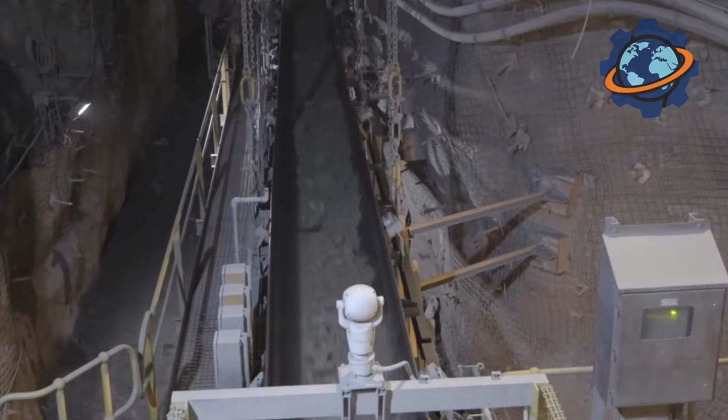But that's just the beginning. The stone then goes through a whole series of crushers and screens, giant vibrating sieves. The goal isn't just to crush the rock, but to carefully sort it by size. The result is entire mountains of clean, sorted stone, which we call aggregate. You've got everything here, from large, fist-sized rocks to fine crumbs and even dust, like sand. Each size is stored in its own separate pile. It's like in your kitchen, where you have flour, sugar, and salt, each ingredient separate, waiting for its turn. This is the skeleton of the future asphalt, making up 95% of its mass.

The second place where asphalt is born is an oil refinery. When crude oil is processed into gasoline, diesel, jet fuel, and other light products, a thick, black, viscous substance is left at the very bottom of the distillation tower. This is bitumen. In its normal state, at room temperature, it's as hard as a rock. You can shatter it with a hammer. But if you heat it up, it becomes a liquid, like thick syrup.

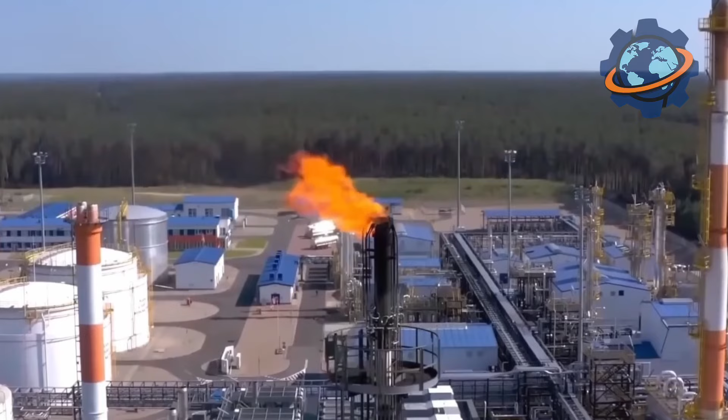It's this property, being solid when cold and liquid when hot, that makes it the perfect glue for our stone skeleton. Bitumen is the soul of asphalt. Its black heart holds everything together.

Now, let's head over to the asphalt plant. This is where all the ingredients come together. From a distance, it looks like a complex tangled metal jungle. Tall silos, endless conveyor belts, pipes, tanks, and a central tower with smoke rising from it. It's a real factory that works like a single, well-oiled machine.

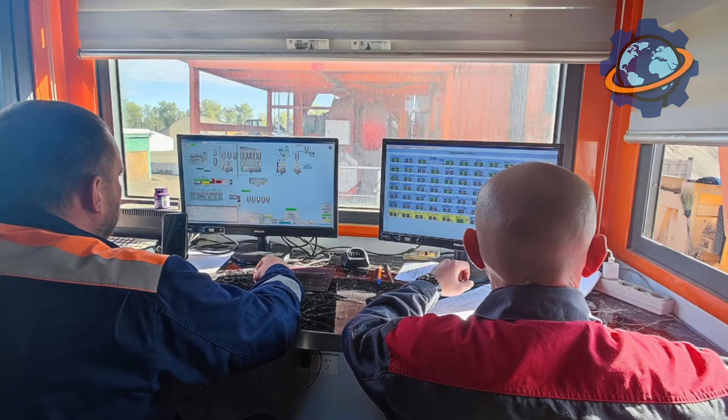Different sizes of aggregate are fed from separate bins onto a conveyor belt. But not just randomly. The whole process is controlled by a computer. An operator in a control booth inputs the exact recipe for the asphalt. Depending on where it's going to be used, a busy highway or a quiet side street, the recipe will be different. The computer knows exactly what percentage of large stone, medium, small, and dust is needed for the perfect mix. It's like baking a complex cake, where every gram counts.

This mix of stones begins its journey up a long, inclined conveyor and enters the heart of the plant, the drying drum. This is a huge, long tube that slowly rotates, set at a slight angle. From one end, a powerful burner blasts a roaring pillar of fire inside, like a jet engine. The temperature inside hits 300 degrees Fahrenheit. The stone, slowly tumbling inside this drum, heats up, and most importantly, gets completely dried out.

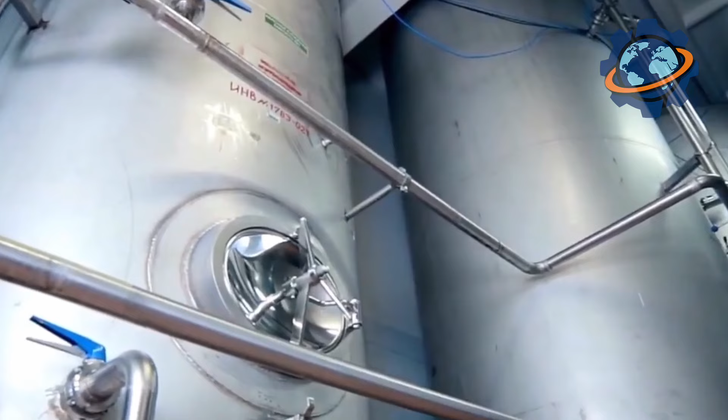Moisture is the #1 enemy of good asphalt. Even a single drop of water can prevent the bitumen from sticking properly to the stone's surface. So, the stone has to be bone dry. After the drying drum, the hot, moisture-free stone is carried up by an elevator to the very top of the central tower.

There, it passes through another set of screens for a final quality check on the sorting, and then falls into hot storage bins. Meanwhile, in special insulated tanks, our black glue, the bitumen, is being heated up. It's also brought to a high temperature to make it fluid and runny. And now comes the climax. The computer gives another command.

A weigh hopper, with incredible accuracy, measures out the required amount of hot stone of each size from the different bins. Then, a precisely measured amount of hot liquid bitumen is sprayed into this superheated stone mix. This entire mass, stone and bitumen, is dropped into a mixing chamber, called a pug mill. It's like a giant kitchen mixer, but instead of whisks, it has 2 powerful shafts with metal paddles.

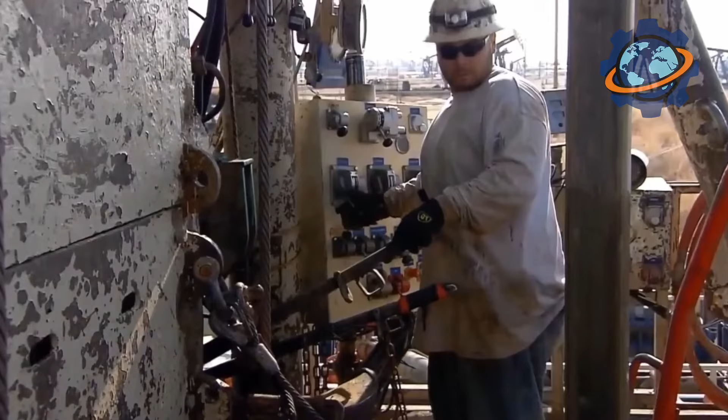These paddles churn the hot mass with enormous force, and in less than a minute, every single stone, every grain of sand, is coated in a thin, shiny film of black bitumen. Out of the chamber comes the finished asphalt, a uniform, steaming black mass with a characteristic oily smell. Now this hot, freshly made product needs to be stored until it's shipped out.

It's lifted and dumped into special insulated storage silos. They're like giant thermoses that can keep the asphalt hot for many hours, sometimes even days. Dump trucks pull up under these silos. With a loud clang, a gate opens and several tons of hot asphalt pour into the truck's bed with a roar and a cloud of steam. The bed is always covered with a tarp to keep that precious heat in during transport to the paving site.

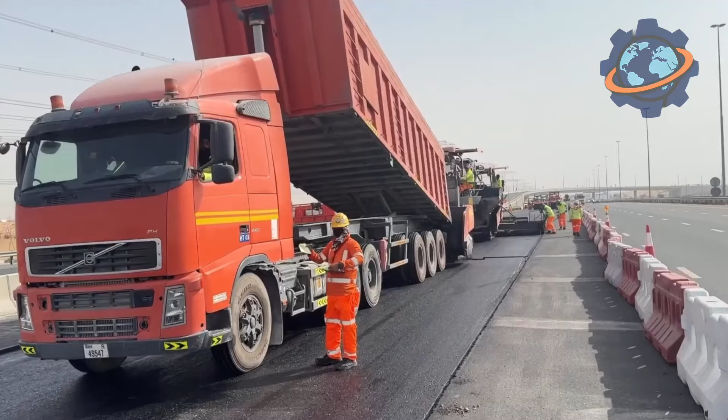At the construction site, the final act begins. The dump truck slowly unloads the hot mix into the hopper of a special machine, an asphalt paver. This machine, moving forward slowly, evenly spreads the asphalt over the road surface, forming a perfectly level layer of a specific thickness. At the back of the paver is a heavy, heated plate called a screed. It does the initial compaction and gives the surface its first pass of smoothness, but the asphalt is still soft and loose. To make it strong, it needs to be compacted.

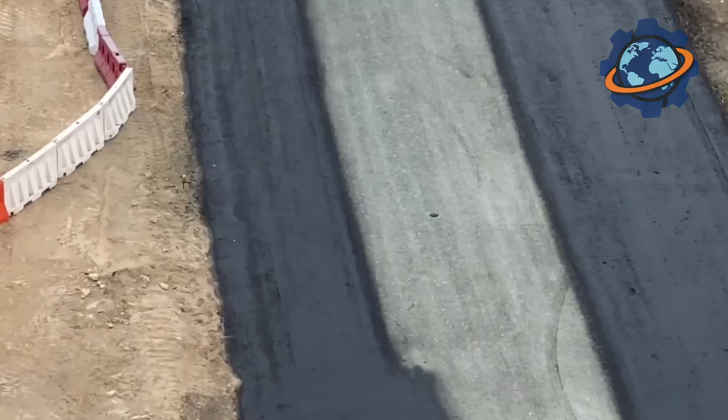Right behind the paver follows a whole team of heavy road rollers. First come the large steel drum rollers, which use their immense pressure to squeeze the air out of the asphalt mix and force the stones to lock together tightly. Then, pneumatic tire rollers might be used, which knead the surface, making it even denser. And in the final stage, smooth steel drum rollers pass over it again to give the road its final, smooth finish.

As the asphalt cools, the bitumen turns from a liquid back into a solid. It permanently glues all the stones together, turning the loose mix into a strong, waterproof monolith. After a few hours, the road that was recently hot and soft becomes hard and ready for traffic. And that's the whole point. From the explosion in the quarry to the heavy roller on the road, every stage of this process is designed to create a durable, reliable surface that will withstand thousands of cars every single day.